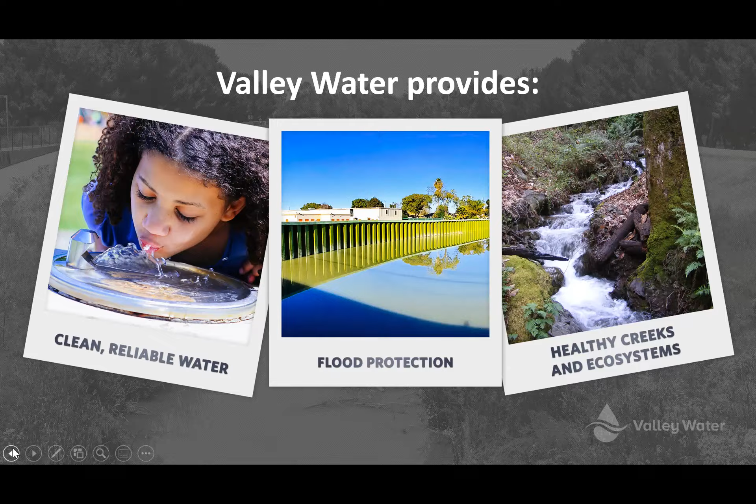So the water supply comes from different ways. Half of it comes from outside the county as imported water. And then 30%, which is very important, is local water. We use it for groundwater recharge, and some of it naturally recharges groundwater. Our groundwater is so important to us because it's a big reservoir under the soil. You get a lot of benefit by having that type of big container, which saves your water and doesn't have evaporation. It keeps it clean and everything else. So we don't want to impact that water.

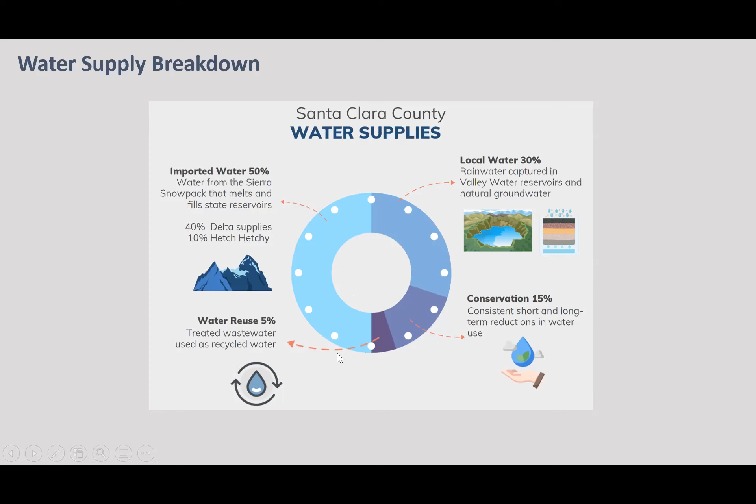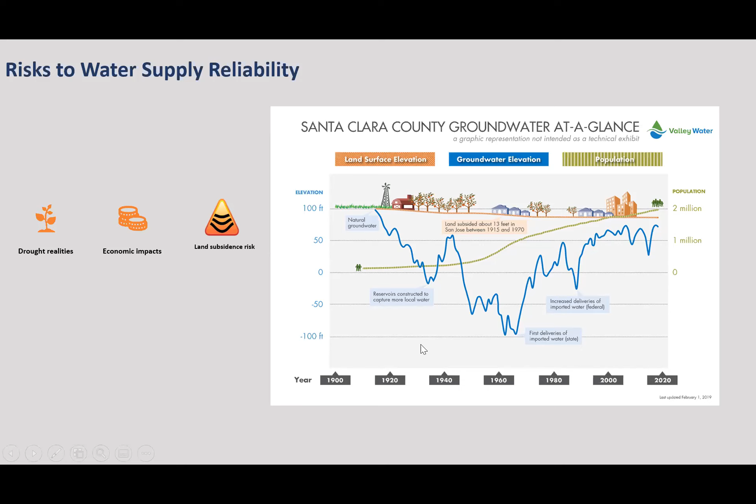So that's why we are investing not only in the other things, conservation and bringing more water to the county, but we are also putting a lot of effort into recycled water, which makes sense because you don't have to use water just one time. You have to recycle it like everything else. So where are we with recycled water in the county?

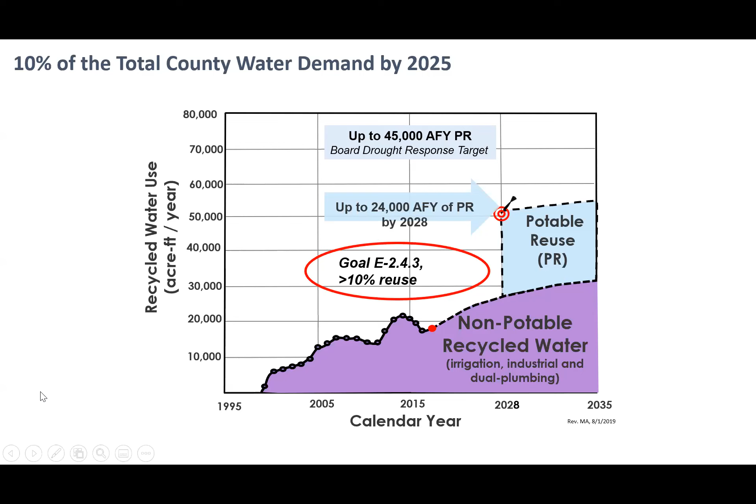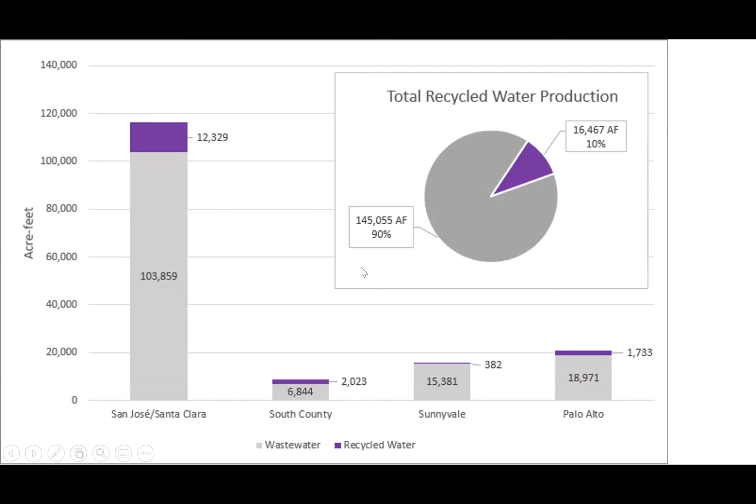So what we did is look at how much water is available in the county as wastewater. You can see that about 90% of the wastewater hasn't been used. Only 10% of it has been used for recycled water. So we have so much water available to use for either recycling or purified water.

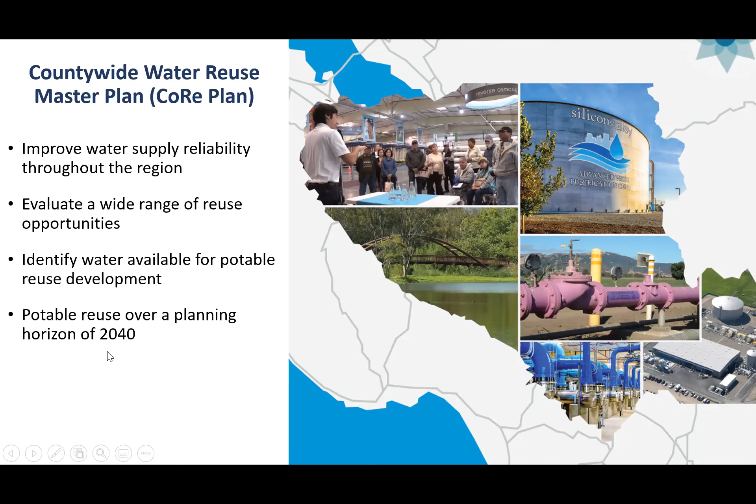So with that, we said, okay, we are going to do, for the first time, a countywide water reuse master plan, which looks at all the recycled water in the county holistically, all the wastewater availability, and then sees what we can do to actually use that water. The planning horizon was up to 2040. So we looked at what the possibilities are here.

So as you can see in this picture, there are a lot of possibilities for using the wastewater that's available from the wastewater treatment plants in the county, which are our partners. They're not under us, but our partners work with us in the county to actually use that water.

So one is, as I said, enhancing recycled water, which we're doing right now. And then the other one is groundwater recharge that we're working on. And we'll try to come up with the design and construction through a public-private partnership.

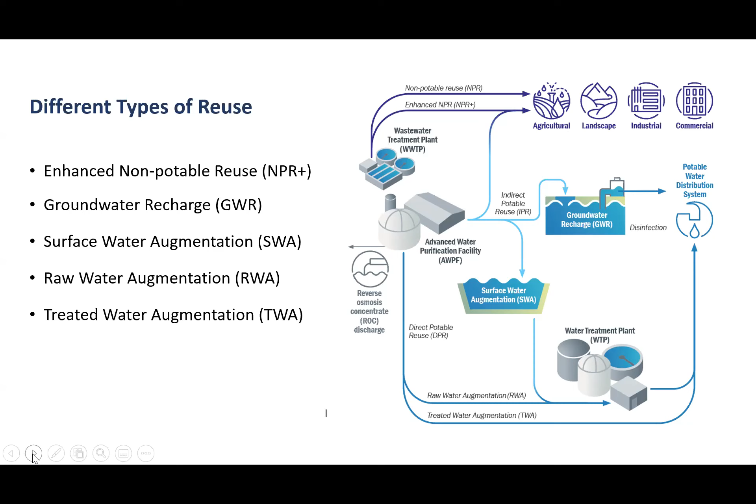The part that is very important is, okay, what is this plan doing for us? So we look at the plan to look at all the possibilities in the county. What are the potential things that can happen? As I said, it could be expansion of the existing recycled water, or development of groundwater recharge with the purified water. And then it could be direct potable, where after the purified water has been created, we can put it directly into the distribution system. So these are the different areas.

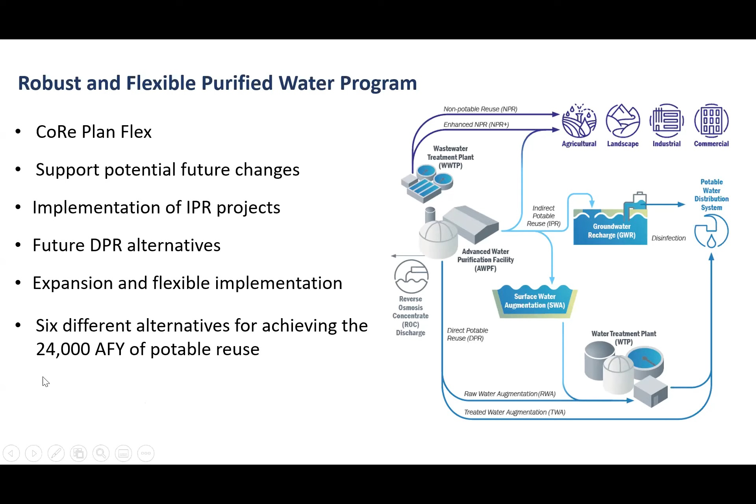And the part that is very good about this master plan that we did is it's so flexible. You can pick from one area and add another area into it. So it makes it flexible to make sure we have all options available to us. So we are looking into different alternatives to come up with 24,000 acre feet of water reuse.

And with that, the first project that we're looking at, which we call a near-term project, is going to be groundwater recharge. So we are looking to purify wastewater and then put it into the ground, recharge that water to the ground, and have it available for our retailers to pump from groundwater, and that is pure water.

So not only are we doing that, we are making it much safer and better, because based on the regulation, we can just go to tertiary treated level, which is what we're using for irrigation, and put it into the ground. But we go one step above that when we do advanced treatment. So we make it much cleaner before we put it into the groundwater.

And then there is other flexibility that we look at. The next phase would be raw water augmentation and treated water augmentation. These are where you can get that purified water and put it either before the conventional treatment plant and treat it once more, or connect it to your distribution system, which is a pipe-to-pipe system. These two, raw water augmentation and treated water augmentation, they call direct potable reuse.

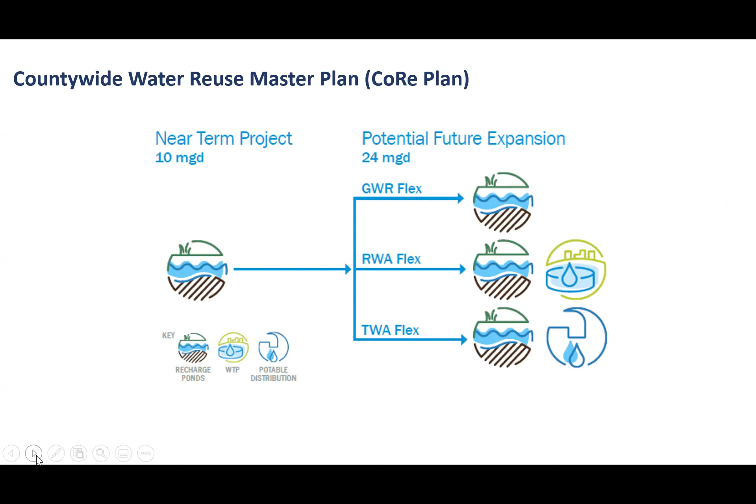The regulation is not there yet, but it's coming out in 2023, next year. So we are working on that with regulators and other agencies to make sure it's going to be available for us in the near future.

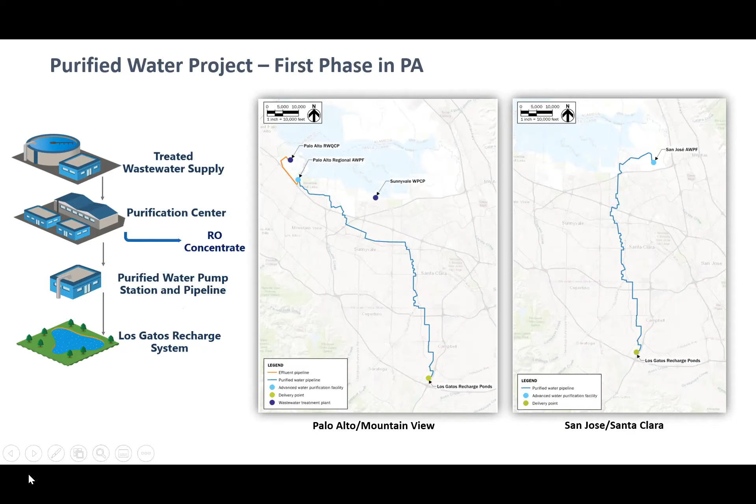These are the different options. As I said, the master plan, which for the first time we developed in the county, looks at everything holistically together. We look at Palo Alto and San Jose, because there's a wastewater treatment plant in San Jose and also Palo Alto. If you want to get the water and use it for water supply, purify it and use it for groundwater recharge or direct water use, these are the different options that we have.

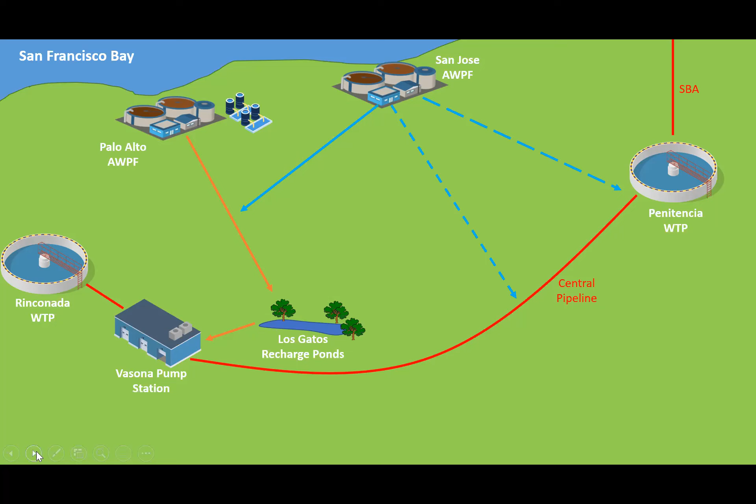So this is the beauty of this master plan. Look at all the options that are possible. This is the kind of timeline that we have for the first and largest purified water project in Northern California. That's the one that we call it.

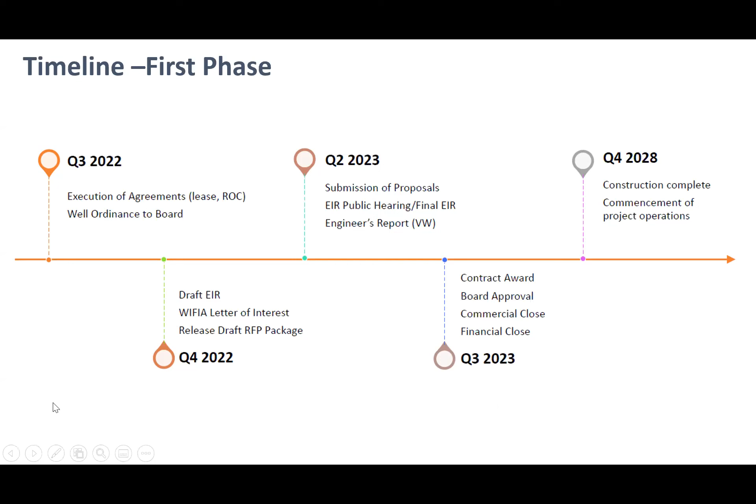We are working on it now, and hopefully we will be getting to, as I said, using the public-private partnership, and by 2028 we're looking to finish this project and start using the water. So from now until 2028, there's a lot of things happening: designing, construction, operation, and everything else that we have to get permits for too.

One thing I wanted to mention, it's very, very important, is in order to be really successful in those projects, because we are not responsible for wastewater in the county, we have partners in the county. We work with different partners like San Jose, Santa Clara, Palo Alto, Sunnyvale, and in South County we work with the SCRWA. So these are the 4 partners we're working with. So we need to really make sure that we have that collaboration going. We get the wastewater from them or treat the wastewater from them and then go through the advanced treatment.

And another thing, very important, stakeholders, the people that are going to give us the ideas on how we're going to do it, what is the best way to do it. The regulators, we keep them in the loop from the beginning. And another thing we're really proud of is the independent advisory panel. These are the most knowledgeable people in the nation, I would say, helping us look at all aspects of this project, to make sure the water is safe and completely successful, and that everything from the beginning to the end we're doing in the right way. So these are areas that we really emphasize.

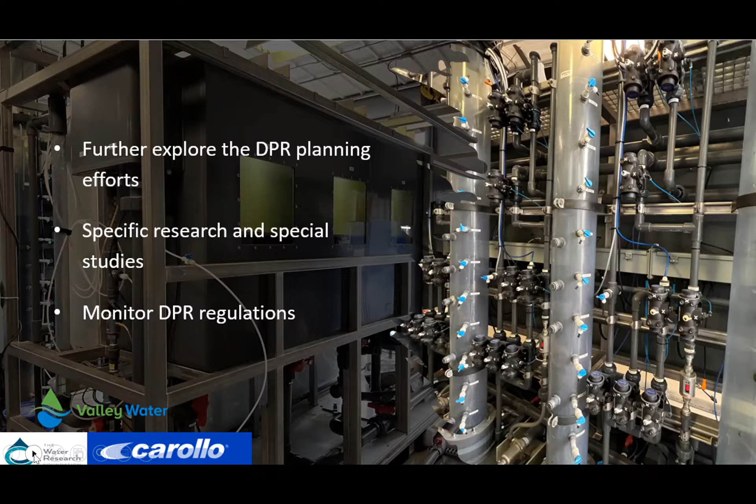And one thing we also want to emphasize is the technology. So we're looking not only at IPR, but also at potential future DPR, which we call DPR ready, the direct water reuse. So we are doing a lot of research and studies with other agencies and ourselves at the Silicon Valley Advanced Water Purification Center. This has been a great thing for us, to really use this center not only for now, but also for the future of water supply.

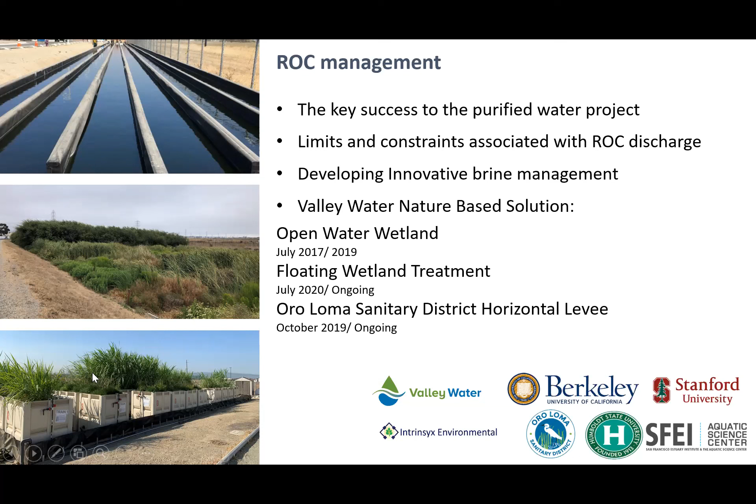So at the end, I just want to give you the highlights. As I said, we need at least 10% of total water supply in the county by 2025 to come from recycled water. The next one is developing 24,000 acre-feet per year by 2028, and this groundwater recharge project I mentioned would be the first phase, giving us about 11 to 12,000 acre-feet per year of water supply.

And needless to say, this water is really drought resistant and is also increasing the water supply. And it's not only helping this area, this very important area, as Nicole mentioned, but other really important areas in California.